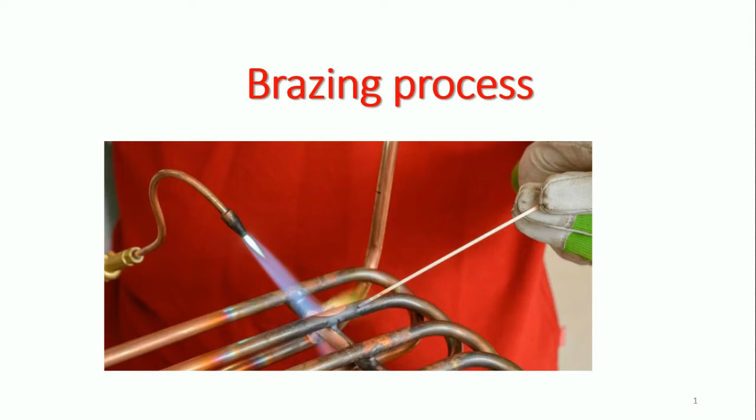Most probably you will get an idea by seeing these slides what is meant by brazing process and what is the best suitable material for brazing, in the category of repairing work. Now brazing is nothing but joining of two materials. We have to heat the metal, then melt the filler metal, then we go for the joining process. In the very beginning I told you about autogenous, homogeneous and heterogeneous welding. If you see carefully, we are adding a third element to the material, so it is a heterogeneous weld.

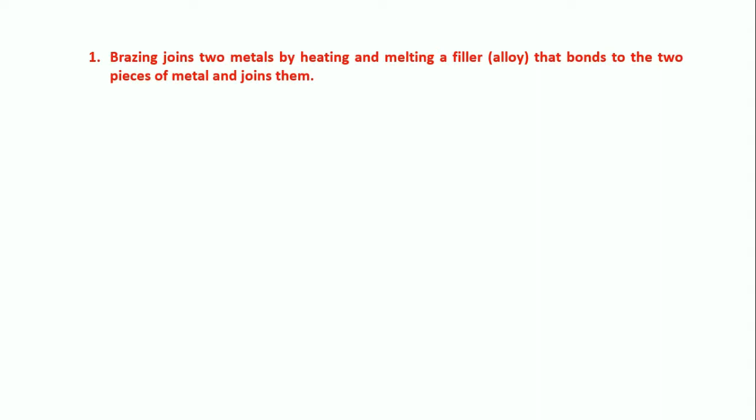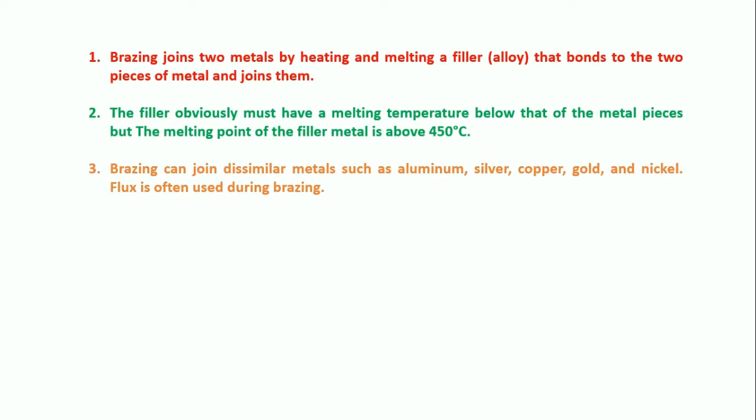The filler metal's temperature is 450 degrees, that is the minimum. Kindly note this temperature level, because this is the main difference between soldering and brazing. So what are the materials that we can join? Aluminum, silver, copper, gold, nickel. And not only these materials, we can also do some dissimilar joints by using this copper filler metal.

So what about the joint strength? That's a question which will arise in our head when we talk about joints. Most probably the strength is good up to a certain level. There is a small graph; after seeing the graph, we will get an idea.

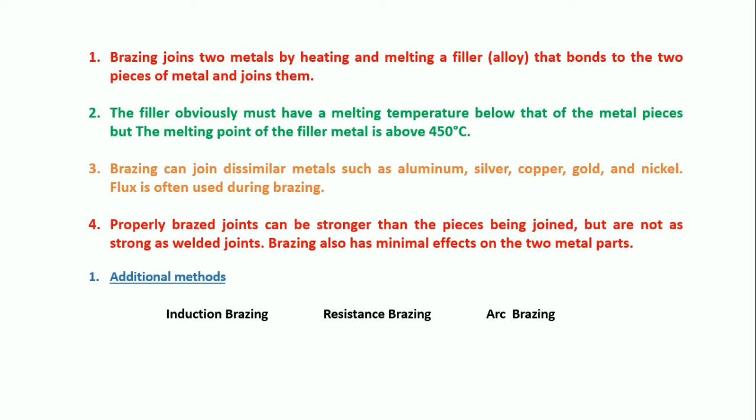My students, please go through this additional reading. These are all the latest technologies in connection with brazing. Kindly take the textbooks and go through this topic. Since this is in 5 minute clips, I will not go through these special topics, I will only take care of the brazing process.

Let us see this image again. He is using a filler metal and a flame, and he is melting the filler metal to deposit over the base material to make the joint or do repair work. If you are unable to see it in the first figure, let us see the schematic diagram. Welding torch, flame is available. Most of the time we go for repairing work on copper tubes. These copper tubes you will see in air conditioning units. Repairing work on copper tubes used in air conditioning units is the best application for the brazing process.

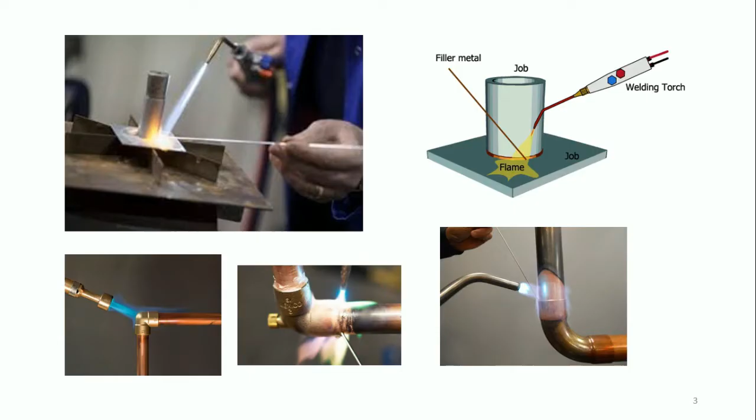Another one: if we have mass production, generally we take the parts to be brazed, place them here and put the filler metal here, then they are passed on the conveyor. Next stage they reach the furnace. In the furnace we generate the heat, and with respect to the heat and the filler metal temperature, we supply and control it. Inside the furnace the filler metal will melt and make a small deposit layer over it. You can see it in the output.

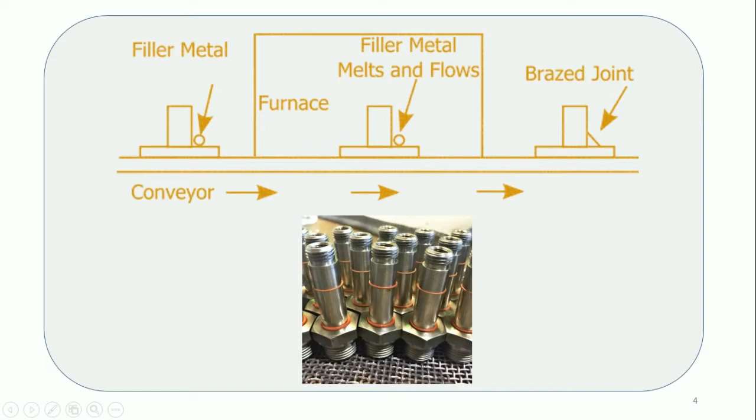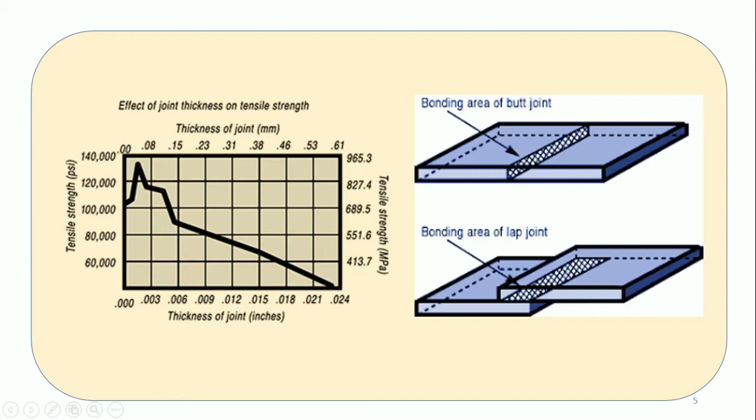And you see another figure, how the joints will be represented, how it looks like. You can see two pieces are jointed here, 1 and 2 are butt jointed. The contacting surface of the brazing will look like this. Due to the capillary action, you may take that word, that also plays a major role for this joining process. Again, the lap joint, the surface which is going to make a joint is shown in the cross section, dotted points or different contours we have shown.

But in welding the temperature can go more than 4000 degrees Celsius depending upon the welding process. In some welding processes it may go around 3 times of 4000 degrees Celsius. If you are going for laser, sometimes it will evaporate the materials. Yes, think about the temperature and heat input.

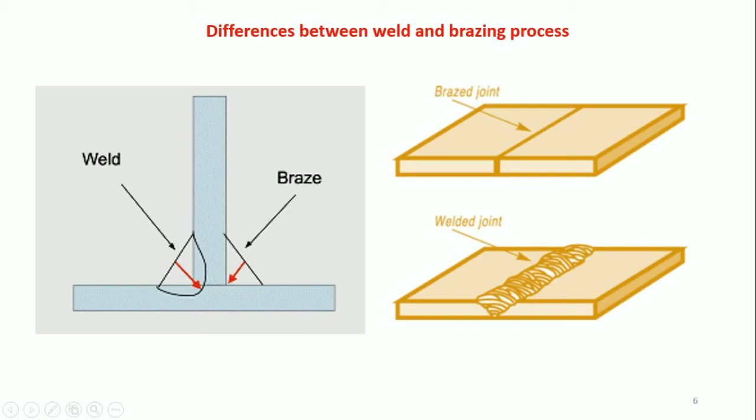And next one, braze joints. Previously we have seen, and this one explains the basic difference between braze joints and weld joints. Braze joint, did you see any extra projection? No, smooth finishing appears. And in the weld joints, as you can see, different layers are available. Typically it's a multi-pass weld, right? So because of that it appeared. Let us go to the next slide, you will get another idea.

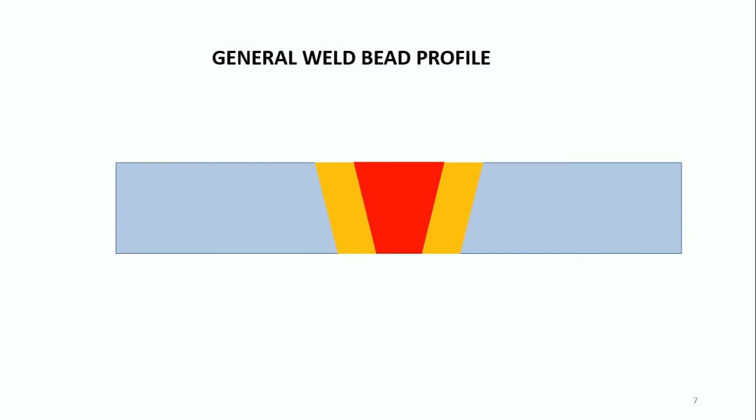General weld bead profile. If you're taking any welding operation, the workpiece will appear like this. 3 regions will be available. Let me go through quickly. First one is the fusion zone at the center of the welding portion. Second one is the heat affected zone. It is just a little bit away from the fusion zone, only 2 mm to 3 mm away from the fusion zone. So the temperature received by the heat affected zone is less, so it will not affect that much.

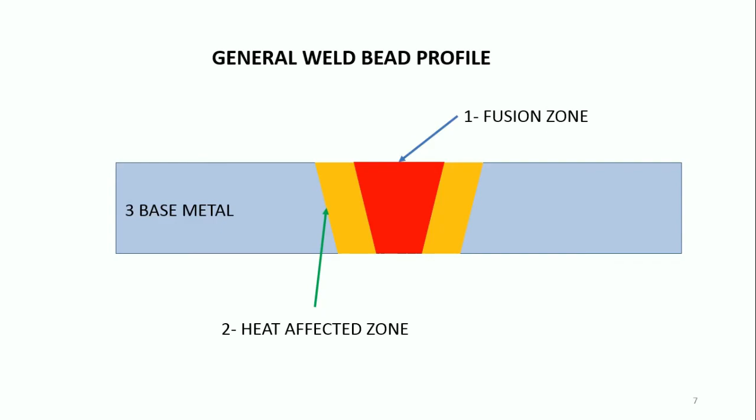Okay, another one is the unaffected base metal. Three things you can easily identify in the weld joints, but in brazing you can't. You are not believing my word? Just go to the next slides. These are all research articles and some examples that I have taken from web sources. It will be very helpful for you.